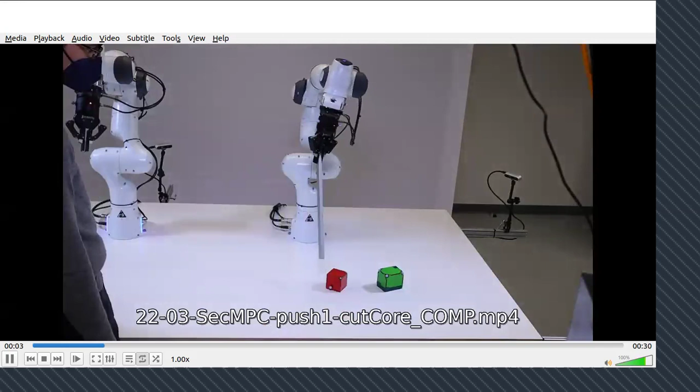Okay, so let me start with the first one. I typically start with a little video. So here is a little video of behavior that is really simple. There's much more complex stuff you can see out there in robotics research, but I'm just starting my talk, so I'm starting with something simple, but I want to highlight one thing.

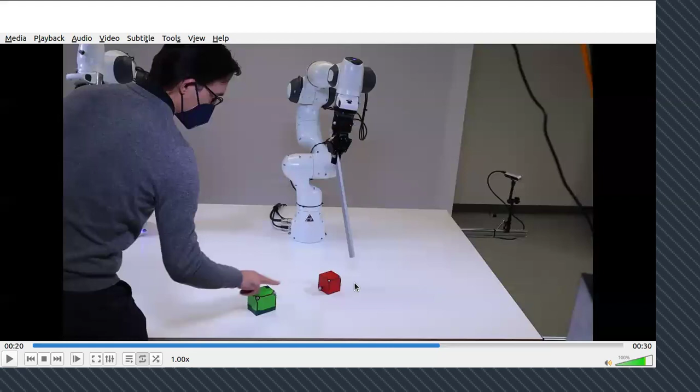This is what's happening right now: I'm changing the goal. Let me go back, so I'm changing this goal. What you see here is that the system is adapting and approaching in a different direction. If you think about this more, the approach direction, which I'm going to describe in a second, is like 3 steps before reaching the goal.

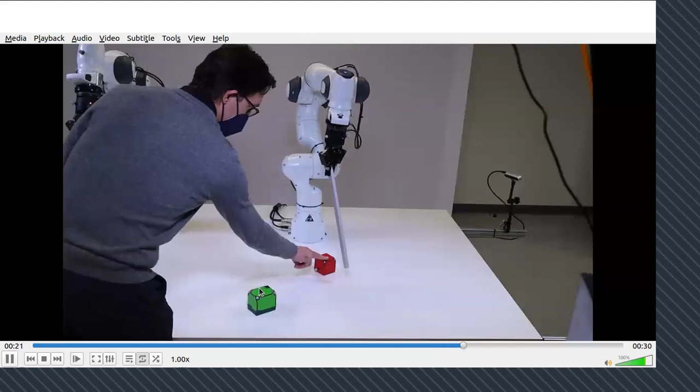I didn't mention the goal. The goal of all of this is always that the robot pushes that little red box so that it ends up touching the green box. This is the overall task. But you see this really reactive behavior, where when the goal changes, or the goal constraints change, it propagates through this whole chain of intermediate reactive controllers to show the behavior.

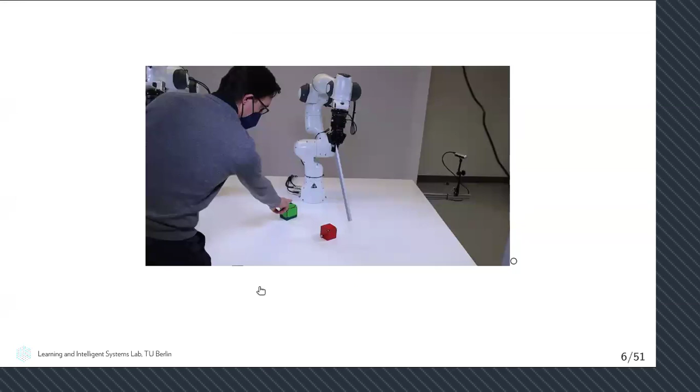I'm going to show a bit more complex behavior later, but let me first try to explain what's happening. First I'm going to explain it in simple terms, and it is actually quite simple. Then I'm going to show you the math behind it also in a second.

A key thing to get this very reactive goal-directed behavior going is that the system maintains an estimate of these future states. What does that mean? The system is right now in this state, x0, which is the current configuration. When I say configuration, I always mean the robot pose including all the object configurations.

So this is the current state, but the system implements some kind of MPC method, an MPC loop, which typically estimates a horizon, like a half-second horizon of the next stage or so. But this one not only estimates a short horizon of the trajectory, but also what I call keyframes or waypoints in the future. For instance, at any point in time it also estimates what the pose will be when I will approach the thing, what the pose will be when I will touch the red block, and what the pose will be when the red block will eventually touch the green block.

The MPC method will couple the estimate of all of these states, so that whenever I'm changing a goal constraint, it immediately propagates back to the MPC that I have to control now. And this is what is behind the method.

The motivation for this, it seems pretty basic what I'm showing, right? But the motivation for doing that research is that I felt, at least in my lab, I think also others, we need a more consistent control framework for task and motion planning. I've done some work on task motion planning, but I always felt that we have some nice math and algorithms to write down the planning problems, but then some awkward gap to actually demonstrate it and translate it to robotics.

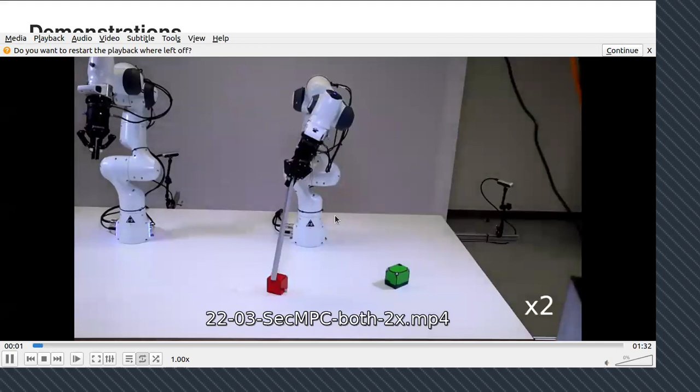Let me show this one a bit longer - I mean, you've seen that one. Again, this looping here is the whole sequence, by the way - the full thing, in total, was 3 minutes. It's just running that same controller. There was no for loop or any outer kind of loop or something like that.

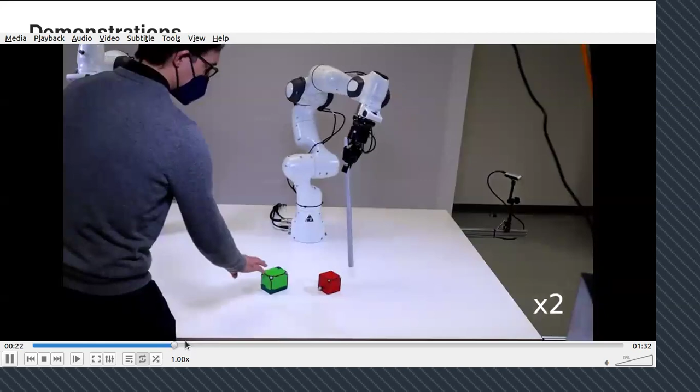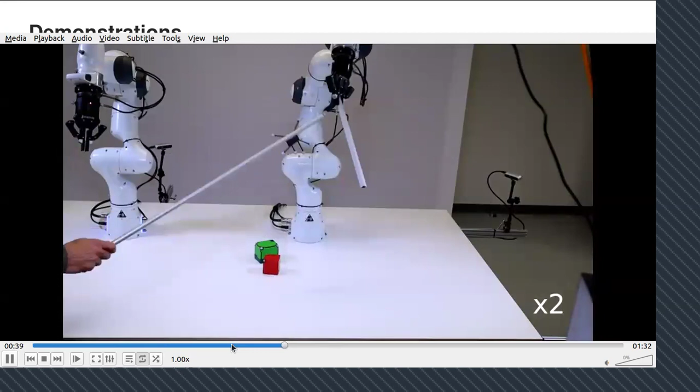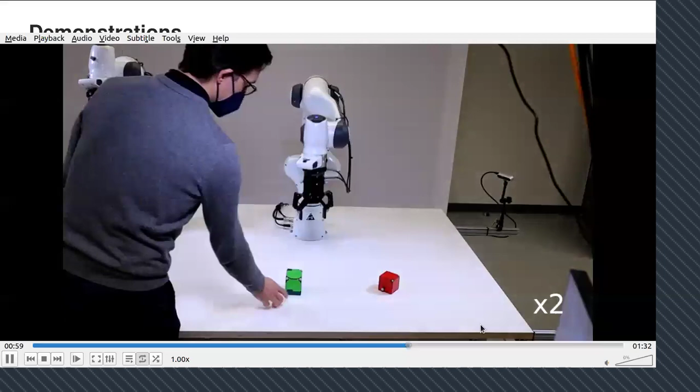We can also mess around with the robot a bit more and try to play with it or annoy it, and it just executes that sequence of constraints MPC. You can also do this for other tasks like stacking blocks - so this is a little stacking. It's very simple again in the beginning, and then I can just annoy the robot and play all kinds of tricks.

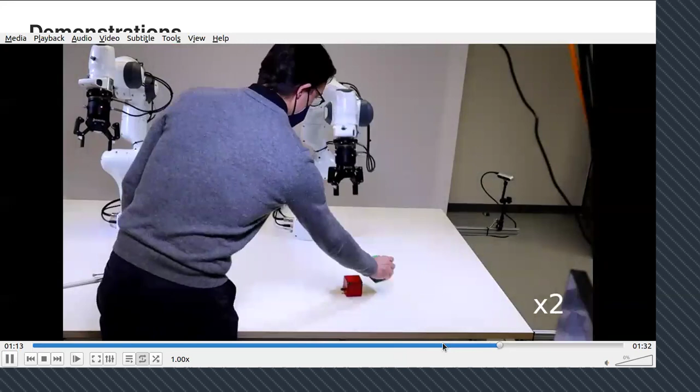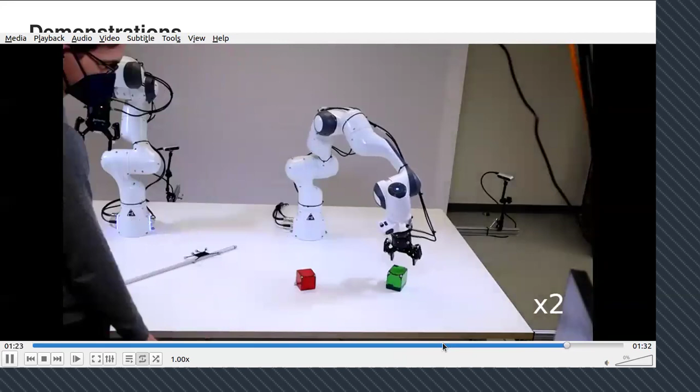And all of this is just this block of controller running without any weird software engineering around it, right? Okay, so yeah, in terms of a control framework, I was kind of happy with that. Let me just show a master student build on that.

For the sake of time, I'm not going to give too many details. It's very similar to what I showed. Basically there's one step more you can do, which is task switching. Here's what I'd like you to look at.

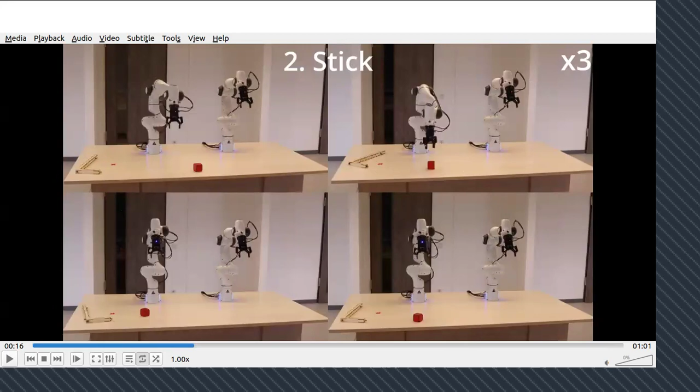If you focus on the top right video here, the goal is for the red block to end up at this little red dot. There's one more step now. It's not only backtracking if something awkward happens, but also switching plans. Initially the robot thought it could do it, but then the student interfered and it had to completely switch plans. Instead of grasping it, it first had to grasp the tool and then pull through it.

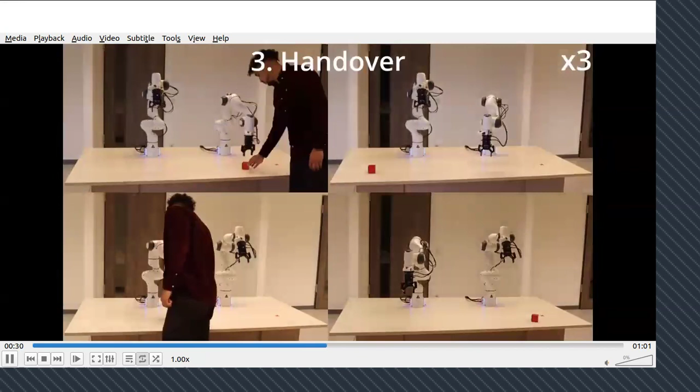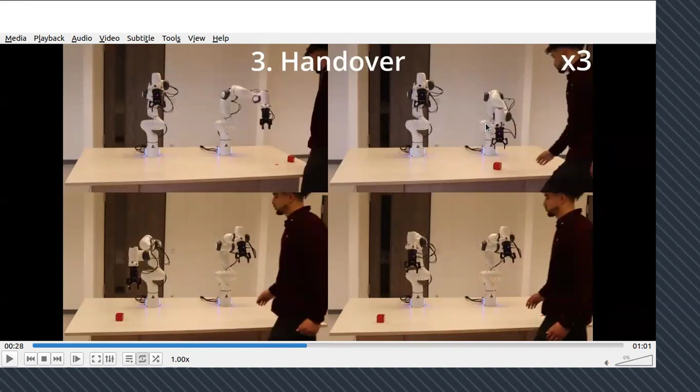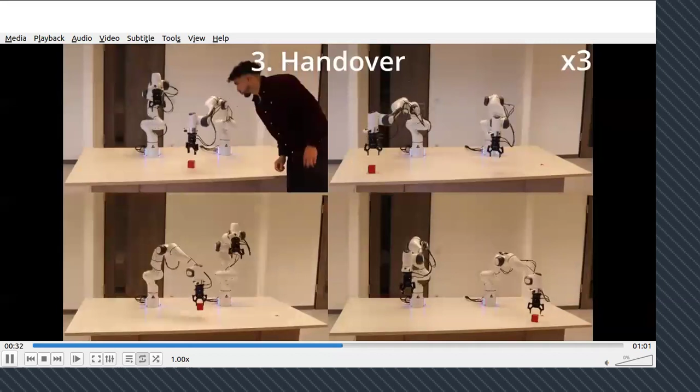Let me back up. The goal is for the red block to end up at the red dot, hidden here behind the thing. Initially the robot thought it could do this. It estimated all the waypoints and directly started going for it. Then the student interferes and the plan gets messed up. It switches to another plan - that wasn't very nice control, but it switches to reach the same goal.

I won't give more details about that. It's very similar to having a sequence of constraints, but now the task planner gives you not only one possible sequence of constraints, but many alternatives. You use these MPC estimates of feasibility of waypoints to switch plans.

Pretty straightforward. I'll skip related work and conclude this first part with a couple of things. First, these behaviors that you just saw, I find them interesting and really think it's worth thinking about what is the minimalistic mathematical formulation or problem formulation that lets you understand and achieve these kinds of behaviors.

Also, what I like about this work - people sometimes talk about the sim-to-real gap, meaning the simulation doesn't match the real world. So I sometimes also think about the math-to-real gap. It's half joke, but I talk about this with students too - meaning you wrote down all the nice math, but the question is how much software engineering do you then put on top of that nice math to actually realize this on the real system.

I find it sometimes not nice if you have nice formal models and then you start using behavior trees or finite state machines or whatever other ROS machinery offers to actually get this to show complex behavior. I almost feel the reason is that there's something missing that we haven't formalized well enough. And that was one attempt to do that.

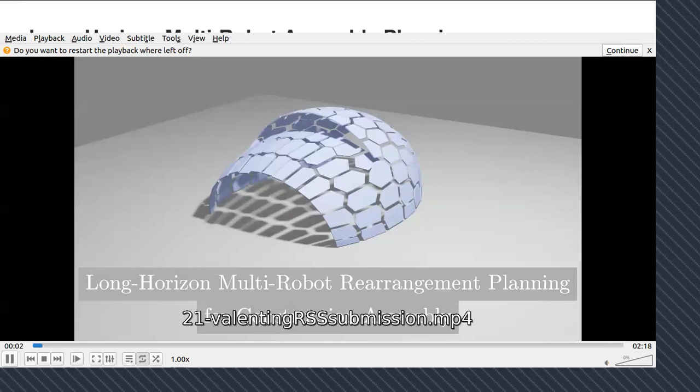Now let me move on a bit, being quicker about this one. We also did work on scaling these kinds of problems to very large fleets of robots that assemble constructions. That was in collaboration with architects from Stuttgart—there's actually a whole cluster there on architectural construction. The architects asked, can your robots assemble large structures? We initially said yes, and then later learned how hard it is. But we developed a couple of methods.

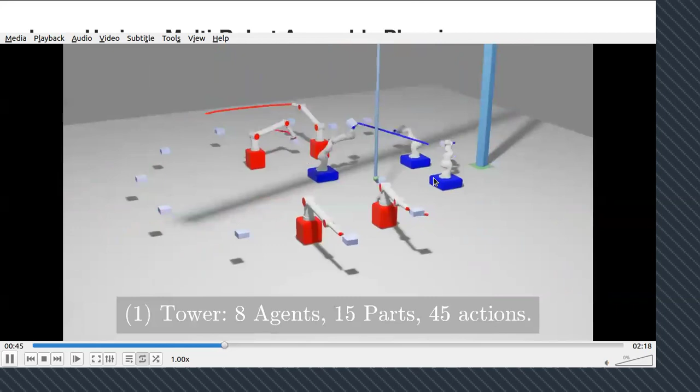So what you see here are different kinds of buildings or structures being built. The first example involves heterogeneous robots: some are mobile, and there's a crane that can hand over pieces to the mobile robots. Let me skip ahead—this next one is an example where we have many agents, like twelve or so.

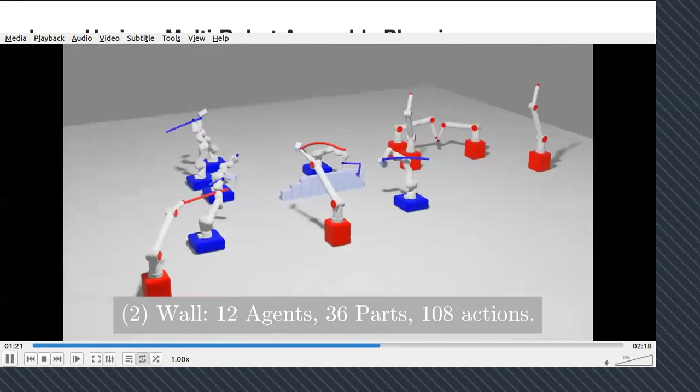And I'll explain the problems in a second, but I mean, these are many robots and they always stand in the way. That's kind of like the problem. So really coordinating them to not stand in the way and allowing you to have this coordinated assembly is really a challenge. This is another structure.

And the last example is, here we go. Yeah, assembling a pavilion, I think you say, some artistic kind of structure from the architects in Stuttgart, which has quite so many pieces, 113. And the basic question is, we wrote down this fancy mathematical program, LGP, which kind of claims to solve everything. Really, right? You can use it as a formalization of the problems, but can you actually then also solve these kind of problems? And if yes, how?

And obviously, you cannot anymore jointly solve this holistic joint optimization problem over all agents over the full horizon. That's just insane. That's not possible. At least you can write it down on paper. That's good already, but not solving it. And so that student actually worked a lot on decomposed methods to solve it. I skip over this quite a bit, but the first insight is you definitely have to decompose the problem. It just doesn't work anymore that you plan jointly for all of them for all times. So you decompose. So far, so obvious. You solve for one of the agents.

But what I underestimated, I must say, is as soon as you decompose the problem, it leads to so many follow-up problems, such as solving for one agent, you have a completely dynamic collision environment because all the other agents are moving. And when you solve for agents separately, you also have to coordinate them later, so have some coordination stage that says which task which agent does. So again, I want to highlight the thesis of Valentin Hartmann, who also just finished, digging really deep into that and developing strategies for decomposing the problem and coordinating the partial solutions to become big plans more reactively.

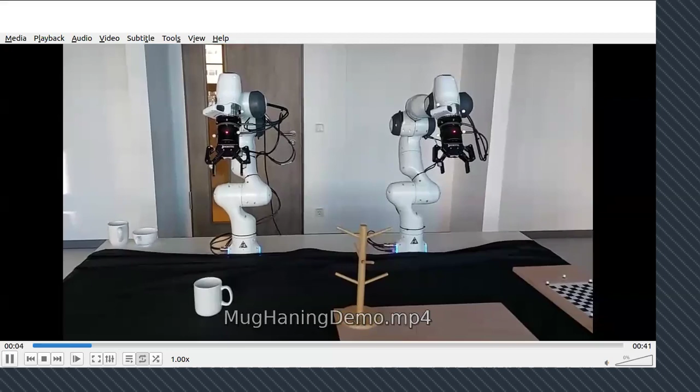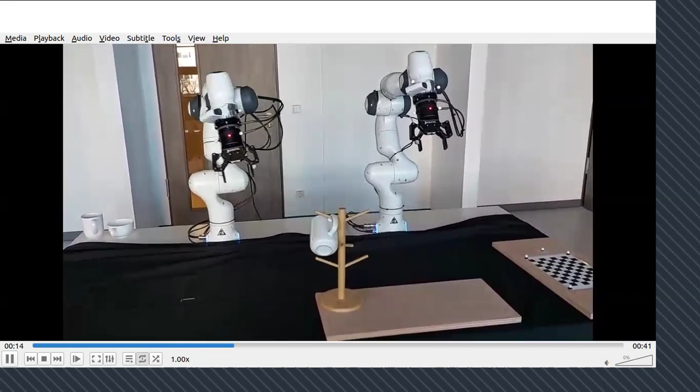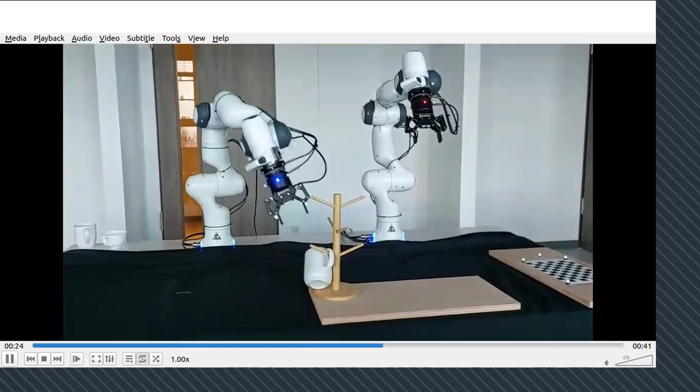Okay, here is a little demo of that. Let me just open it like that again. And what we learned here is actually 2 constraints. The one which represents success of grasping a mug, and the other one which represents success of hanging a mug. Okay, so both of them are not easy to code, or they're definitely annoying to code by hand. Yeah, but if you collect enough data, and we actually collected the data in simulation, you can learn such kind of constraint function.

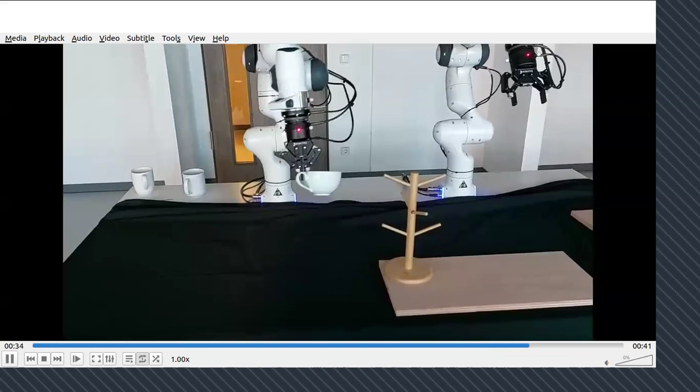And what you see here is really that it's using the neurally learned constraint function within an NLP solver to generate these kinds of paths, and then end up hanging the mug. Okay. So that was about learning task constraints, but we also had some work about learning physics constraints or dynamics constraints. And I want to go really quick with that one also.

When you want to model something like pushing, the success of pushing or the effect of pushing or some other interactions, you actually want to have constraints that represent correct physics in your planning method. And how could you do that possibly without having shape representations or mesh representations? The same thing again: you train a neural system basically to implement the constraint function, which is 0 if it's correct physics. So you actually have a discriminative function or a discriminative model of correct physics.

Technically, how we did this is in the first stage, quite similar to what I just described. First thing is that you represent the environment not as meshes and explicit shapes or something, but as a field, some kind of feature field over 3-dimensional space. Now what we did a bit different is that we also, for every object separately, so we assume to have masks of these objects, actually trained a latent state encoding.

Latent state encoding means that we compress this kind of full field into a very low dimensional number. I mean, low dimensional meaning 13 dimensional or so. So you represent this by 13 numbers. The full state, also the position, orientation, everything, by 13 numbers.

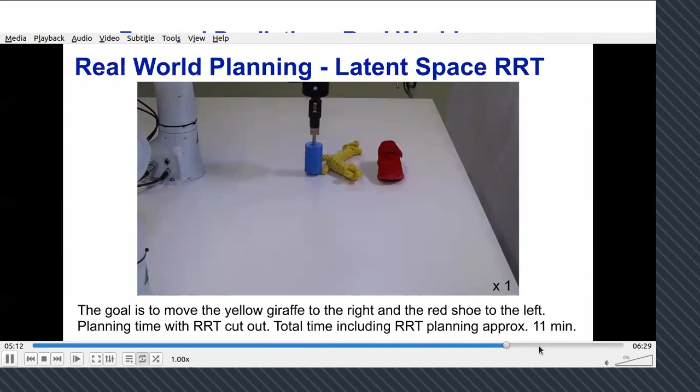Okay, so we can also use this for planning with forward simulating. Deformable objects. So this neural forward prediction also works for deformable objects. And then you can use this also for planning. I'm not sure if I find this somewhere. But anyway, it's not surprising: when we have such a stable long-term forward predictive neural model learned, then we can also use it for planning. Okay, let me stop this and conclude that part.

So the point here is that this formulation of task and motion planning as a mathematical program being model-based, you might think is completely a blocker to integrating deep learning methods. But I think it's not. There are very clear and interesting ways to include very strong learning techniques within that whole framework. And the key thing is that the optimization-based reasoning methods, so the planning methods, operate on neurally learned constraints. Maybe I advertise it quite a bit. There are also real limitations.

So some of these models are actually class specific. Like the grasping was only for cups. I kind of hate that. And some other things here, it's still limited in that we learn the constraints within the domain of the data set, but it doesn't really generalize to all kinds of objects and all kinds of interactions. So still many open problems, of course.

I want to advertise my last PhD student, Danny Driess, who's now with Google DeepMind in California. He did large parts of that kind of learning to integrate learning into task and motion planning, as well as the work that I'm going to talk about next.

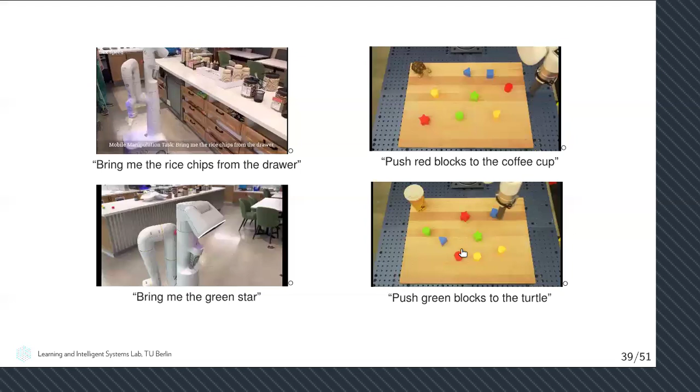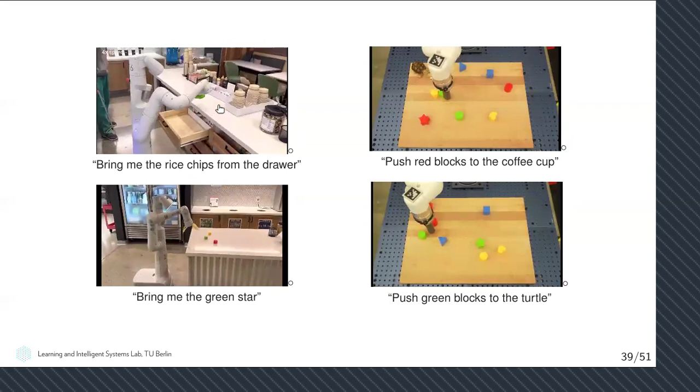So the first one here is the classic one. You have an LLM, and there's all kinds of prompts, which I'm going to explain in a second. At the end of the prompt, it gets a language input, 'bring me the rice chips from the drawer', and then it does this. It's also reactive, because the LLM replanning is iterated in some kind of cycle. I forgot the exact cycle, maybe 2 hertz or something like that, not quite 10, I don't know. It's just repeated replanning if there's some intervention, and then it can bring the rice chips from the drawer and bring it somewhere.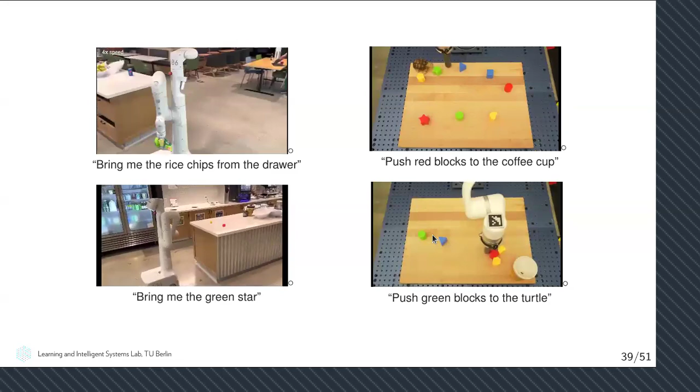And this is a similar thing, 'bring me the green star.' I flipped the subtitles here. This one is pushing something to the turtle, all the green stuff to the turtle, and push all the red stuff to the coffee mug. And it does it.

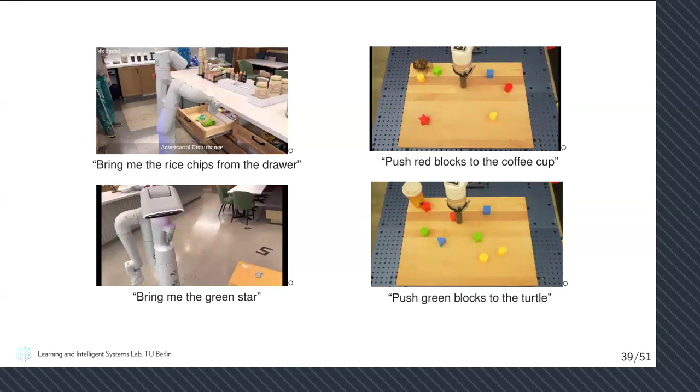How does it work? In a nutshell, it's a large language model, pre-trained. I'm going to explain in a second, but it's special in the sense that it not only takes language as input, but also images, segmentations, and state vectors of robots. So it allows as inputs not only words, but other stuff. It's really a multimodal sequence or transformer model. It's trained, among other things, but eventually the fine-tuning trains it to predict action plans as output.

All of them are embedded into tokens, but the way they are embedded is quite different. Sometimes we use a vision transformer to embed images, other similar ways to embed segmentations. I'm going to explain in a second. The token encoding is then pre-trained, typically with NeRFs or other kinds of techniques. The output sequences, I'm going to ask mostly, are actually action primitives that were previously trained in prior work, so they're fixed. That's also something I don't like so much about the paper. Something like 'grasp yellow block' literally has to be parsable, and it's literally then translated to existing action primitives.